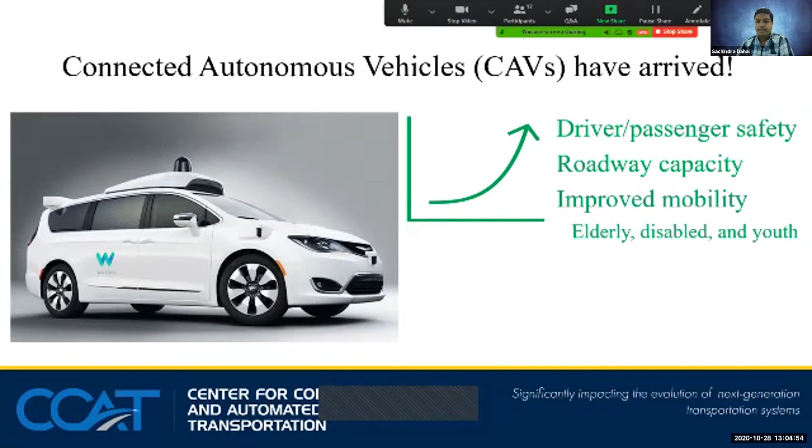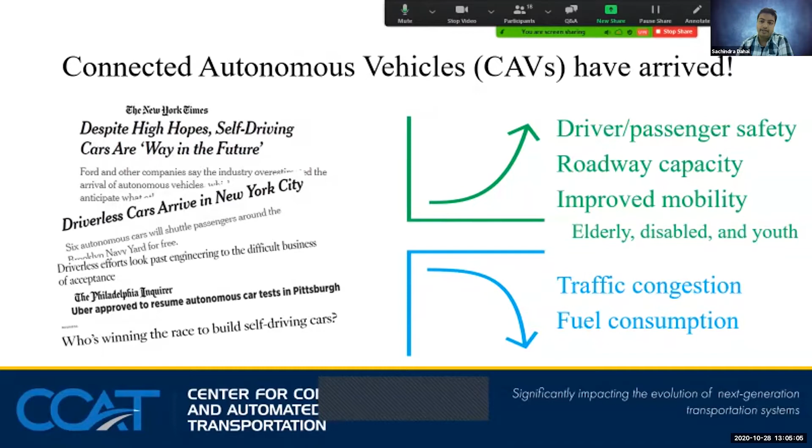Today I'm going to present about passive sensing of conductive concrete for vehicle lateral positioning. So connected autonomous vehicles have arrived in different shape, size, form with different promises. They provide increased driver and passenger safety, increased roadway capacity, improved mobility for elderly, disabled, and youth. And they also provide decrease in traffic congestion and fuel consumption.

So to discuss about how CAVs work, they have two parts, the connected part and the automated part. So the automated part consists of sensing, planning, and acting. So the sensor senses the environment, then the machine learning algorithm or computer vision algorithms plan the path based on that, and the actuators would execute the command given by these algorithms.

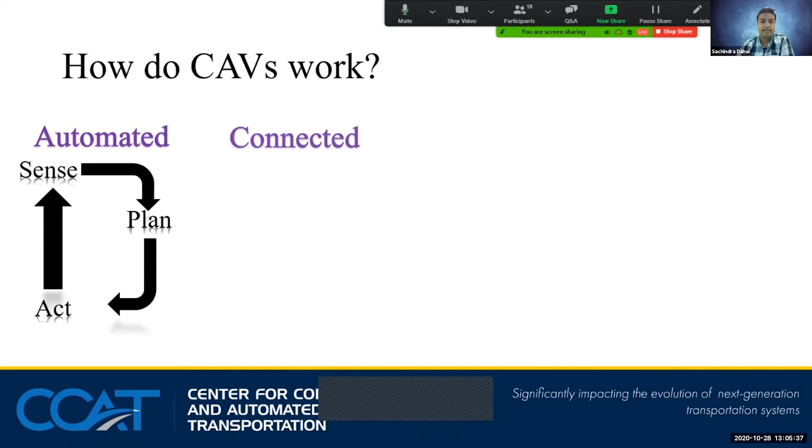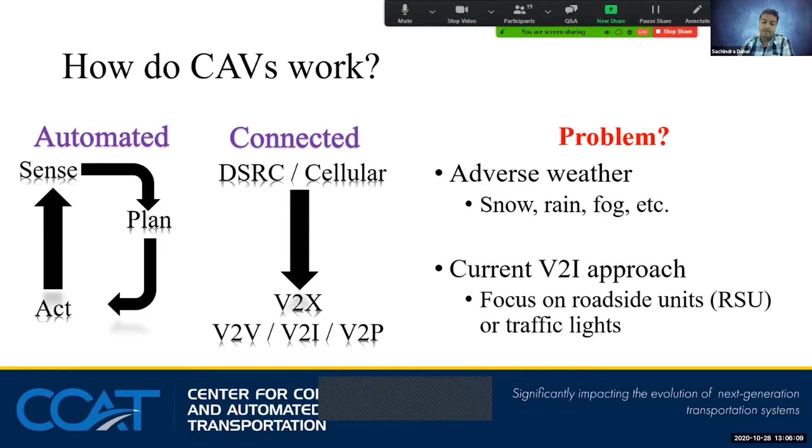And again, there is the connected part, which consists of DSRC or cellular method to implement vehicle to everything communication, basically vehicle to infrastructure and vehicle to pedestrian methods. But the problem is when we have adverse weather like snow, rain, or fog, the sensing part of the automated section gets affected. And also the current vehicle to infrastructure approach just focuses on roadside units or traffic lights. So the biggest infrastructure, the road itself, is missing in action basically.

So to discuss about how the CAVs stay in lane, currently they use GPS as a primary sensor, which gets coordinates from satellite. But the problem is the error is around 20 feet while the lane is just 12 feet wide. So the vehicles also use camera using computer vision to find the lane markings and stay within the lane where the GPS tells it to. So basically it is sensor fusion of GPS, camera, LiDAR, existing maps. So using redundant information to predict better is how they achieve this goal.

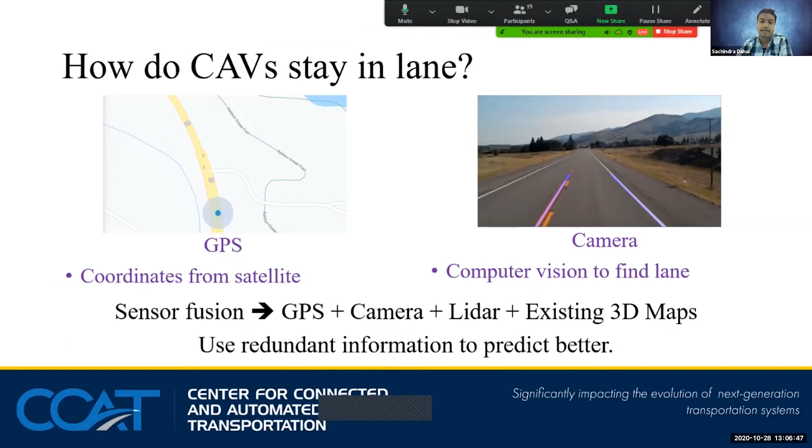But one big problem is improper lane marking. Not everywhere there is very good proper lane marking. And another problem is even if there is a proper lane marking, there is bad weather, which affects the camera. So lane markings are not visible or the signal of GPS is worsened. To put into context, 33 states receive more than 10 inches of snow annually. Or for example, in February 2019, 60% of the US was covered in snow. So weather independence is needed for large-scale deployment of CAVs.

So the question arises, are the roads smart enough right now? The answer is no, because they don't communicate with CAVs. So roadways can actually supplement the current CAV sensors to improve lateral positioning, even when the condition is bad or adverse. So how we can achieve that is by using passive sensing.

We can create a repeatable electromagnetic signature, which is pretty unique and can be identified by the autonomous vehicle. And we can create those signals in the pavement by using construction materials that are commonly used in the pavement industry, like steel fiber or steel slag aggregates. We don't have to use expensive sensors or something that consumes power or needs a lot of wiring.

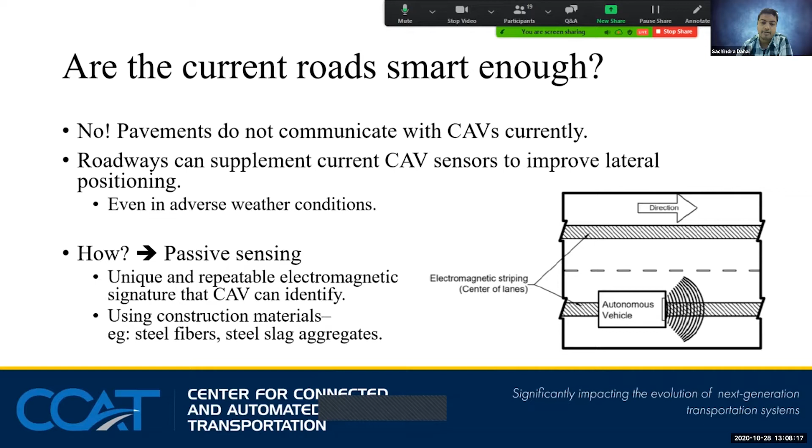So I'll discuss about the lab testing that is going on here at UIUC. So we use a sensor, which is an induction-based eddy current method, and it creates an alternating magnetic field using a 10-inch diameter coil at 200 Hertz. So whenever a metal target is brought into this field, it induces an eddy current, which is detected by the sensor. So in our case, it is a steel fiber reinforced concrete.

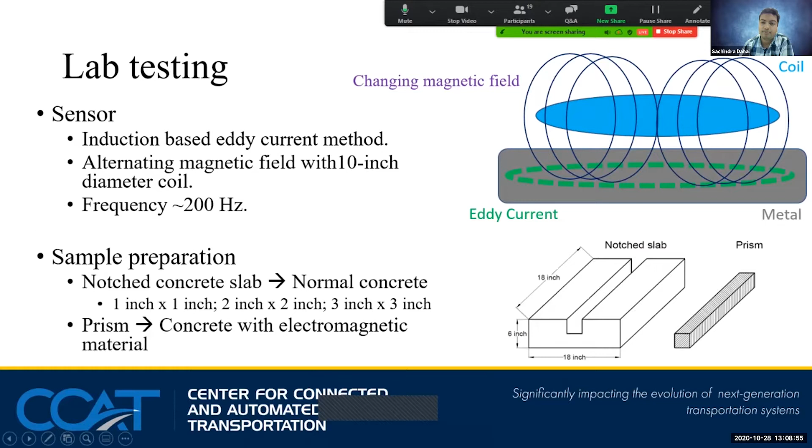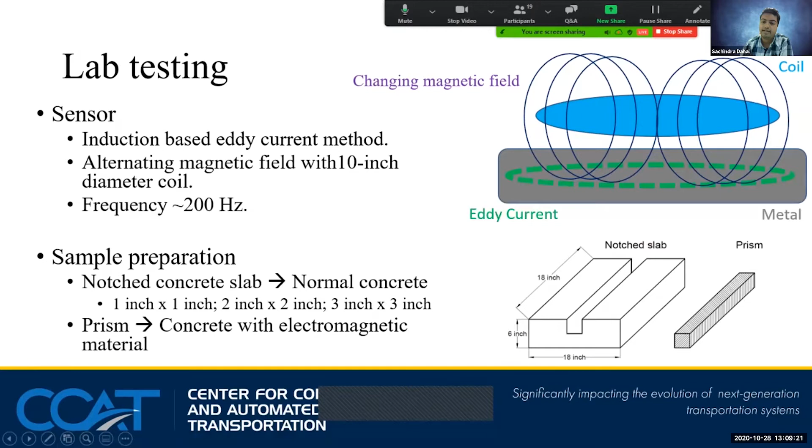So how we test it is we prepare a slab. We have made a slab which is 18-inch wide, 18-inch in length, and 6-inch in height. And on the top of the middle surface, we have made a notch which is 1 inch by 1 inch, or 2 inch by 2 inch, or 3 inch by 3 inch. And what we do is we make an electromagnetic prism or a concrete prism that has steel fiber in it, and we make those prisms of the exact size and put it into this and do the testing.

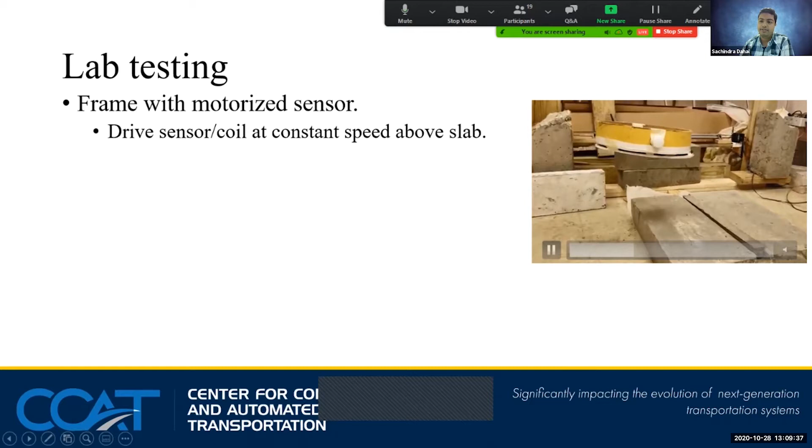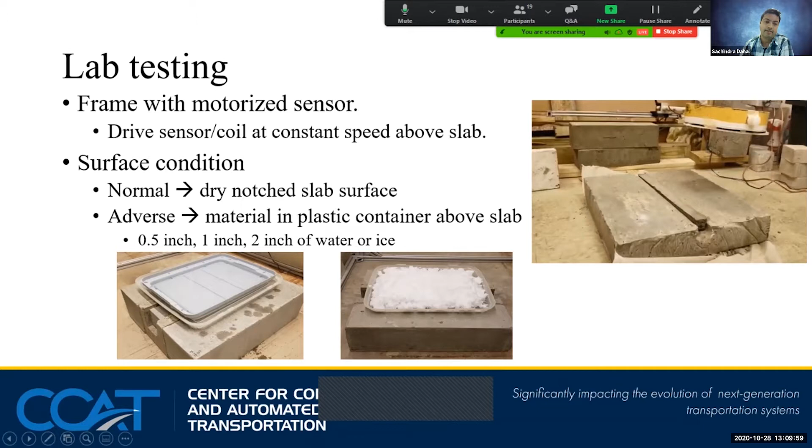So we mount the coil on a motorized frame, and the sensor is driven at a fixed height above the slab, and it is moved at a constant speed to collect the data. And in addition to the normal surface condition, we also test it in a different adverse weather condition, which is created by having a plastic container, which is not electromagnetic, and having 0.5 inch, 1 inch, and 2 inches of ice or water standing on the plastic container during the testing.

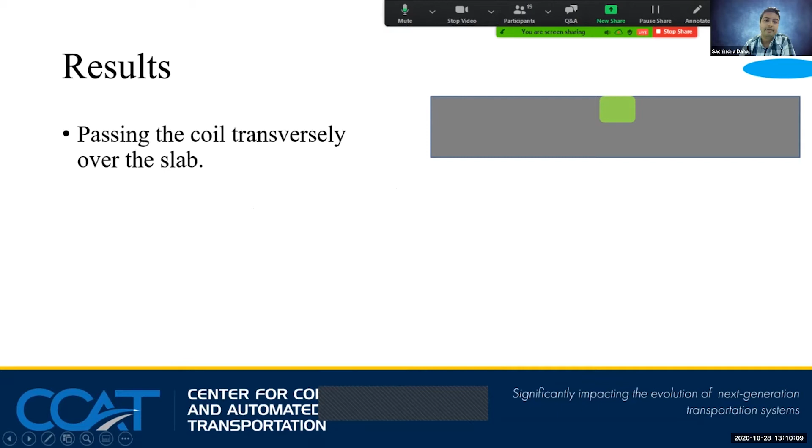So I'll present some of the results that we get when we pass the coil on top of the slab transversely. So this is an example signature. So what we observe is, there is this electromagnetic prism, and as we move the sensor above, the highest signal is achieved directly over the electromagnetic material. And as we move offset from that electromagnetic material, the signal drops out.

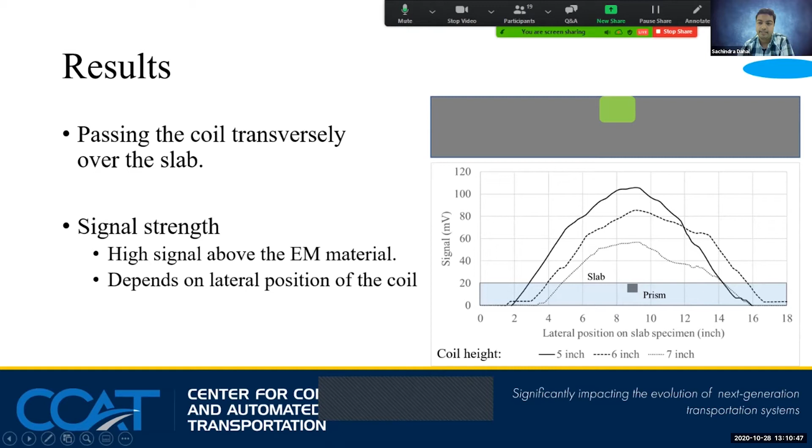So this is an example where we change the height of the coil or the height of the sensor above the slab. And when we increase it from 5 to 6 to 7 inches, the signal decreases. So there are different factors that would attenuate the signal that we achieve. So to test that, what we did is we created different factors. One is sensor height, electromagnetic prism, steel fiber content in the electromagnetic prism, having water or ice on the surface. So we changed these parameters at 3 different signal attenuation levels.

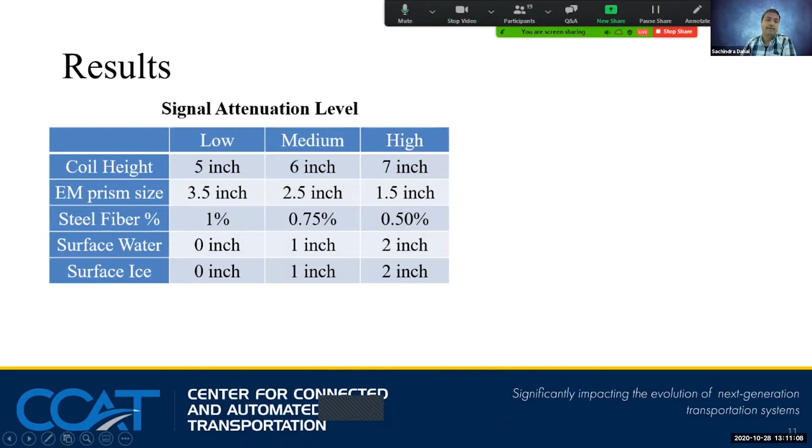So having the lowest signal attenuation gives us the best signal basically. And we increase each of these parameters and see how the signal deteriorates. So for example, this point is when the coil height is at 5 inches, steel prism size is 3.5 inches wide, and we have 1% of steel fiber without ice or water. We get this signal, and we just change each of these parameters and see how the signal attenuates.

So what we observed is these 3 parameters, which are prism size, sensor height above the slab, and the fiber content, attenuate the signal the most. And these are the factors that can be controlled during the design. We can say what size of prism we need in the road, at what heights we can put the sensor in a vehicle, or what content of fiber we can put in the road.

The factor of water: when we had 2 inches of water standing on the slab, it was still detected. It attenuated by 23%, but the signal was still detected. And when we put 2 inches of ice on the surface, we did not see any signal attenuation. That's because ice has a dielectric constant of 3, which is similar to that of air, versus water, which has 81.

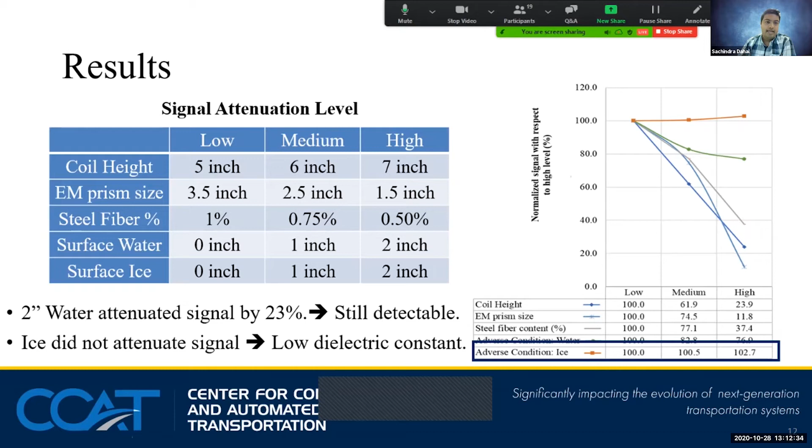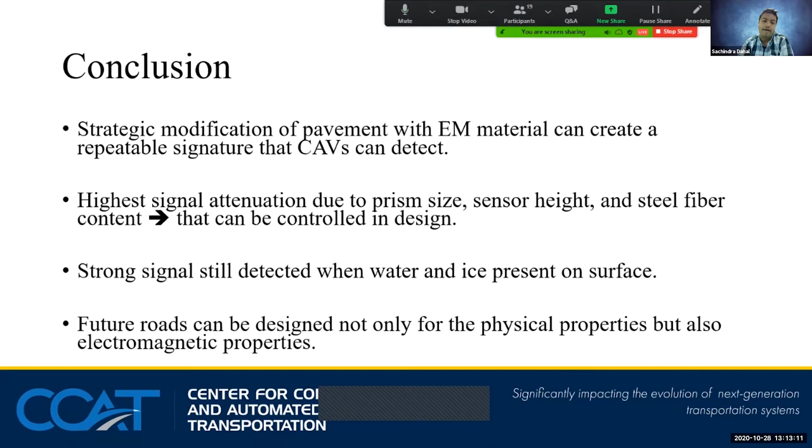So in conclusion, we can strategically modify the pavement material to create an electromagnetic signature that is repeatable and can be detected by CAVs. From our research, it was found that some of the highest signal attenuation parameters can be controlled in the design process. The strong signal was still detected when the adverse conditions were present. And for the future, roads can be designed not just for the physical properties, but also for the electromagnetic properties to help connected and autonomous vehicles.